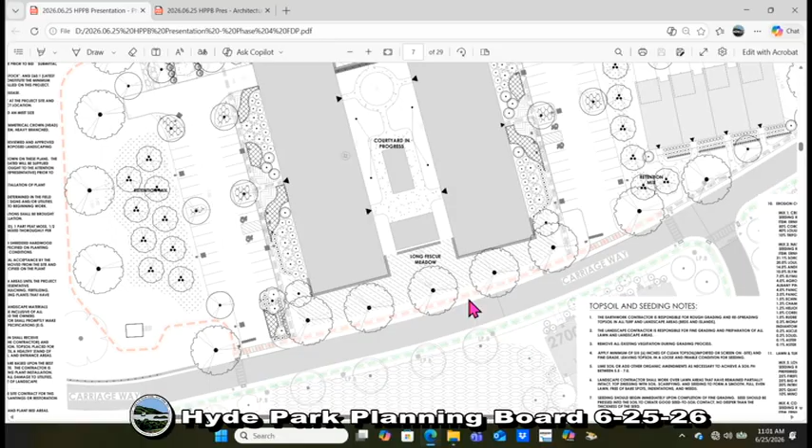Screening the pool, which is good. Even if we do the trees and stuff, if somebody wants to sneak in, he can. Sure, but this is going to have much more privacy. And then, since it's a pool, where is the fencing for the pool? Is it needed?

Somebody could walk off the street, go into the pool and drown, I mean, there's code for that. We'll show the pool fencing, it's required by code. We also owe you an elevation of that.

Hopefully that fencing will be a decorative fencing, maybe some kind of open lattice or something nice, not chain link. No, it won't be chain link. I'm just trying to get the picture in my head of what it is, since this is the first time I'm seeing the cabana type of feel. The other thing is, that cabana roof section, is it going to mirror what's happening up on the upper decks of the buildings, with cantilevers?

That was one option we discussed. Since it's in proximity to the condos, it'll have to kind of fit with the design. Yes, exactly, it doesn't need to look totally different. So you don't want a grass roof on it, or a tiki hut on there? No, I think the terraces on top is kind of what you're looking at.

I think when we get there, maybe a detail elevation in between with the surface material of what the back of that cabana is going to look like from the street would be very helpful, just to get an idea of what it looks like when someone's walking by the sidewalk. Yeah, we could add that to the street section. That would be great, just to give it a sense of the scale. I would love that, thank you very much, because you would ask for that anyway. Yeah, I like that. It comes to life for me. I'm starting to get a better feel for that area at this point anyway.

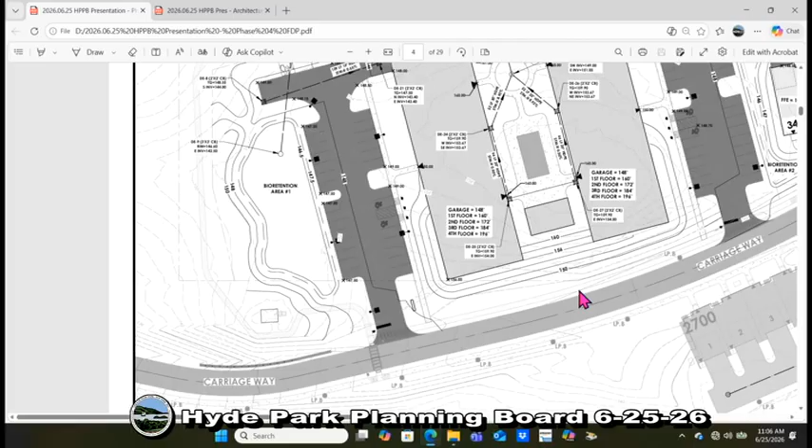Suggestion, before we go on to the grading plan, do we want to go over anything on the layout plan, or do it all at the end? It's up to you. If we have comments on the layout plan, maybe other board members do too, did you want to discuss those now? Hop right in whenever you like. It's because of the way we're seated here and how they're going through it. Please hop in before we move on if you have comments. Yes, but before those comments, I just want to get through the site plan first. Oh, all right, okay. Whatever works, and then he can have his comments on the site plan.

So 3,000, 3,100 is on the left side of the screen. That has the courtyard and the pool, and then the pool house cabana that we were talking about. As you go to the right side of the screen, you see the 8 townhouses there, and originally the driveways were in the front, they're flipped in the back. We re-engineered the grading and all the utilities, all now accommodating that switch, including the bio areas. So you'll see in the grading plan the different bio areas that had to be adjusted as a result of that move.

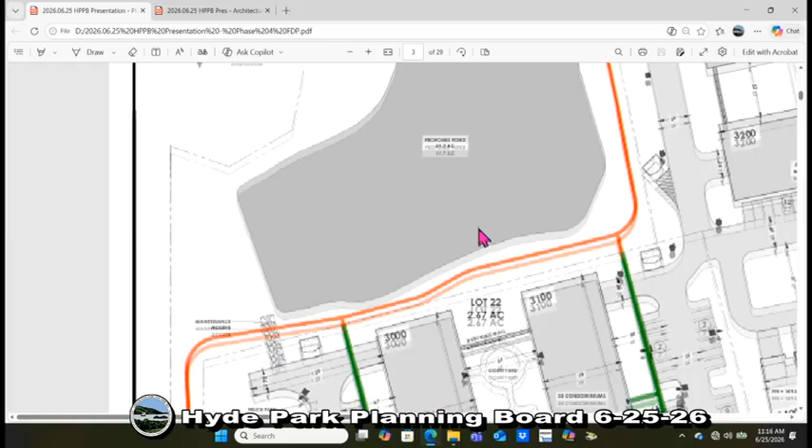We do show those. Are those the villas? Is there an elevation of the entry? The townhouses, I think he means. Yeah, those 8. So there's entrances on both sides. Do we know if they're dressed up or just plain? You'll see in the landscape plan, and in the elevation, the 2 access points. There's a landscaping plan that will be shown. It's mostly done, the courtyards have to be added.

I have a circulation question also, just for when it's snowing and somebody wants to get from one side to the other of this complex. I imagine the sidewalks will be shoveled, but the path will not be, correct? So people will go in the front, go around? That's correct. Okay, that's fair, just asking.

Our next comments are about the dumpster locations, which on the plan we reviewed looked like they were lining up with the driveways into the garages underneath. But I see on the plan here now they've been adjusted, it looks like for head-in garbage truck pickups. Are these going to be garbage trucks that come in head-on and lift over, or are they going to be side load? Mike is still working through it right now, they're head-on.

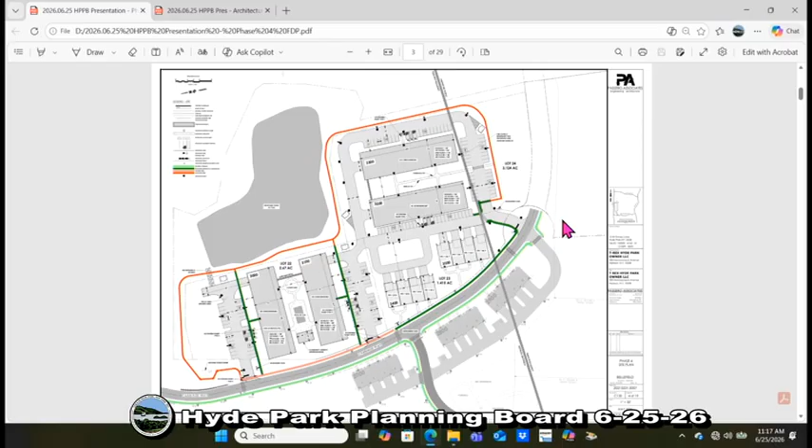Well, they don't work for head-on then, nobody could access them. The truck couldn't access them the way they're shown now. So you have to go look at it. What we could do is include it on our auto turn and make sure it works. But they can't, because the dumpsters are perpendicular to the roads. Well, they've got them different there, can you make that space larger for what they're talking about? Yeah, there was a change, we angled it.

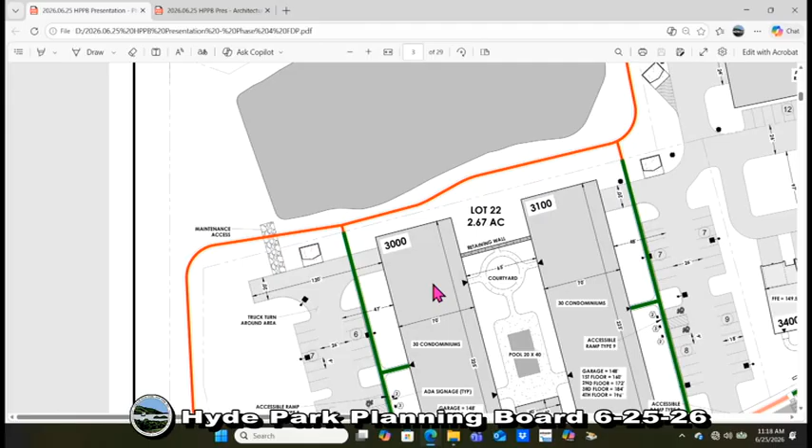Okay, thank you. So I guess we don't know, how is the garbage coming out of the buildings? Are individual people taking it to the dumpsters, or is it going to the basement and coming out? Is there a chute? There are garbage chutes in the building. It'll go down to a container inside, and then staff moves them out. Okay, so if you live there, you're not taking your garbage bag out. Right, so the distance to the dumpsters is really kind of irrelevant.

I guess the key thing is just that they can be accessible by the trucks. By turning it, we recognized that was a problem. Not only that, we wanted to pull it off of the walkway behind there, and you'll see in the landscape plan how we treated that too.

You just read my mind about the dumpster being right next to the trail. We dealt with it - it's a nature moment, we'll show you. We totally get it, wildlife. So we're not going to go through all our comments here.

But I do have a couple highlights. We talked a little bit about the surface treatment in the area between the two buildings, 3,300 and 3,200. It looks like you've already got a plan for a courtyard and some other improvements in there. Does that require any kind of fire access into that area?

We submitted this plan to Dan Nichols for his review. I asked him to call me, and that's where we're at. Generally we try to get 3 sides accessible on the building, so we're close. I'll get his comments and we'll go from there.

At the left end of those buildings is a retaining wall that looked like it was about 9 feet high on the grading plan we saw. That is correct. We're assuming there's going to be some kind of railing or protection at the top. That is correct. Chris, it's a site wall, so you've got to show it on your plans.

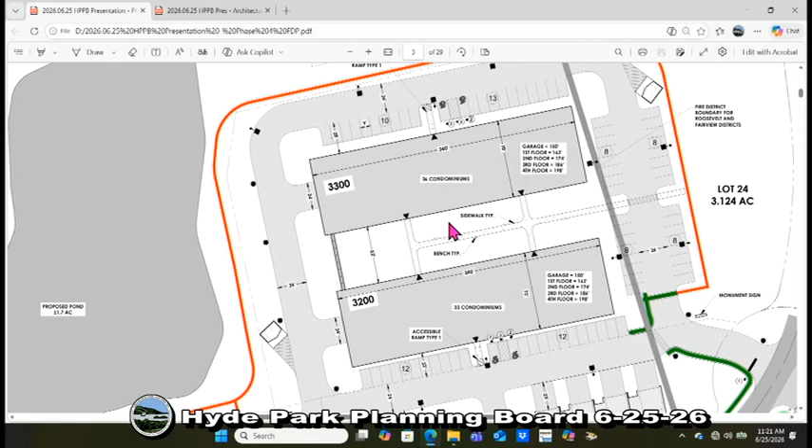And then with the grading, I think we talked a little bit about getting that clarified. I guess one of the things we were looking at - has there ever been any cut and fill calculations for this phase? We can provide it. Passero has an earthwork program, and once we're set, he'll run the counts on it.

I think again the planning board's already talked about understanding the elevations of the buildings and things like that a little better with the architecture.

Did you guys want to go through the grading and drainage before we make any comments? The next sheet here is the grading, we'll go through that. Big picture, any comments you have, let us know.

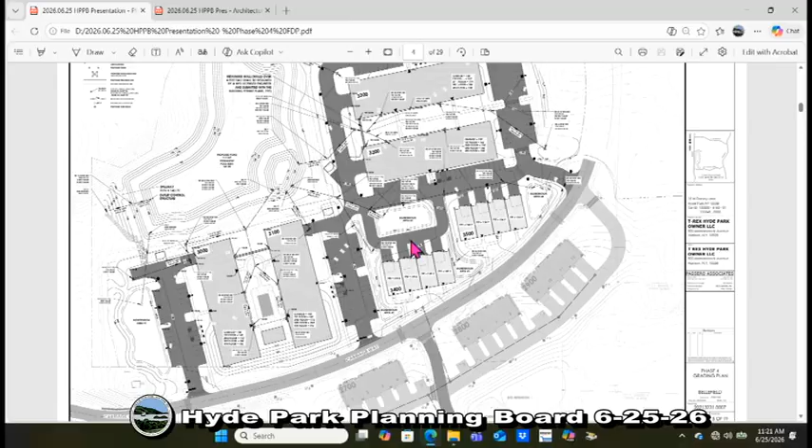By flipping the driveways, we had to reconfigure the storm water practices and the bio areas, so we had one larger area, a couple here, but now we have 1, 2, 3, 4, all graded in there. We show all the sidewalks with access to the front of the townhouses, and you'll see in the landscape plan how that was beefed up.

This is the same design, nothing has changed here. If you had any detailed questions, Chris is here and can answer that.

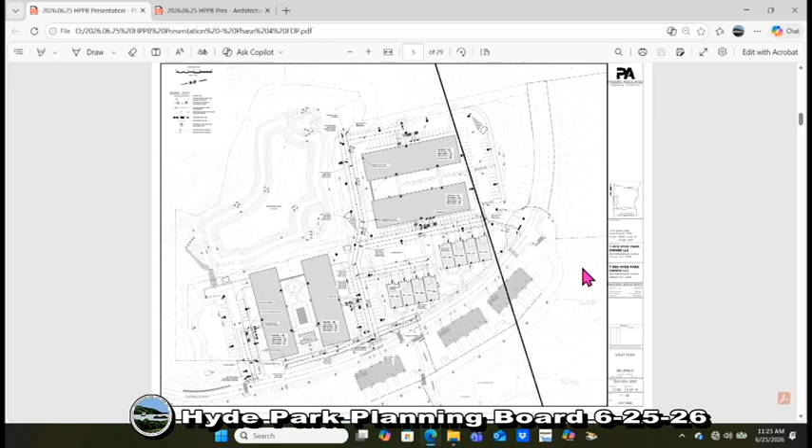Again, the grading plan is right here, if you wanted to come on down. One thing I didn't add to our letter, which is always a comment, is the material and stockpile storage area, staging area where a contractor's going to stage material, gonna be stored, stockpiled. I assume you're trucking the material to the area further north, right? Yes, you mean excess material? Yeah. Yes, that'll go to phase 2B.

I forgot to ask on the layout plan, which kind of corresponds with the grading plan, is like curbing. I didn't see a lot of double line curbing, and usually all of your sites are curbed, so I'm making an assumption it's still going to be that way for this. Well, in some cases where we're draining into a bio area, we just sheet flow right into it. Okay, so where there are curbs, it seemed like there was... I didn't see, and again, maybe... Generally they're going to be on the building side. Every parking area that's on the building side is curbed.

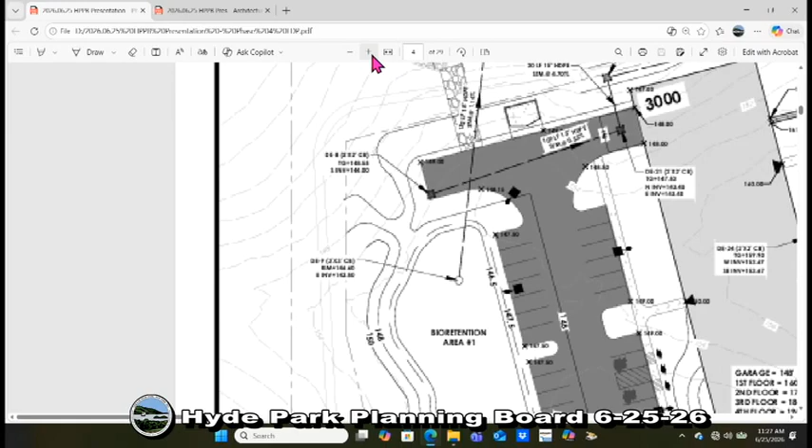On the outboard side of that, where there's a bio area, we can go into the grading plan, let me show you. Well, the grading plan didn't seem to have locations of catch basins in the parking lots where... Yeah, zoom in here, Sharon, zoom into that. So what's happening here is that there's a curb on this side, on the building side, no curb on this side. This just sheet flows right into this bio area, so there's no drainage here, just sheet flow, which is the preferred way to do it.

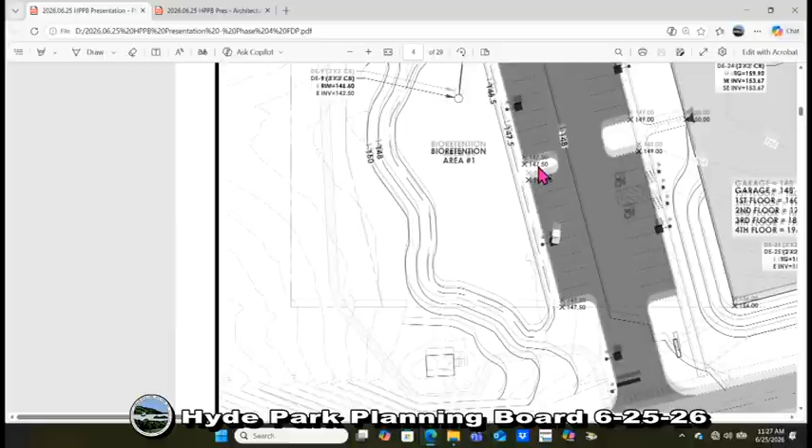Yeah, that's all right, we could start to annotate out some begin curb, end curb. Yeah, I think if you just detail the curb better so we can understand how it's draining and make sure you've got catch basins along the curb where you need them. And then those bioretention areas that have sheet flow into them are going to have some kind of pre-treatment? Those are some of the comments we put into our stormwater comments. Yes. And that pre-treatment helps give it a border or an edge to the parking lot. Yes, it does, it does.

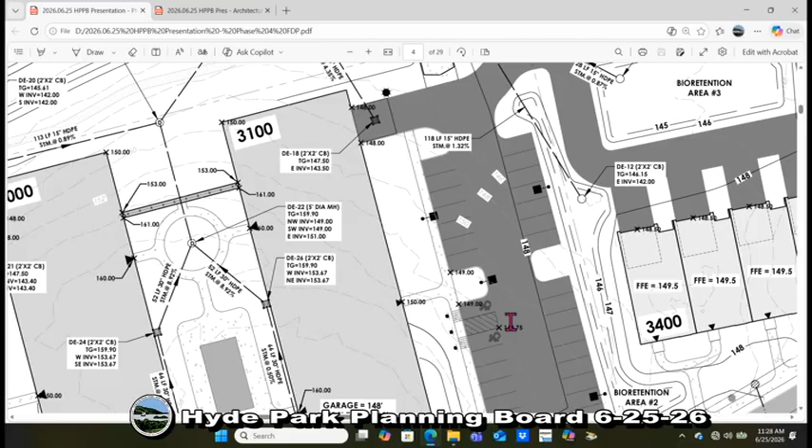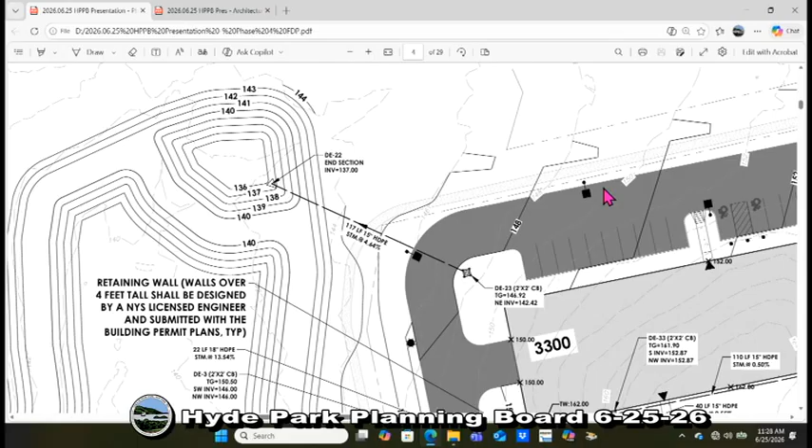And so here on this side, here too, curb on the building side, no curb on this side. You can see the contour sheet flowing right into it. Same thing here, there's no curb around here, this will sheet flow into it, and it's a gradual and relatively not so deep practice too. Yeah, this one here, Chris, we need to look at, it's showing that there's no curb here, the water would get into here, I think we've got to add a curb here and get it down.

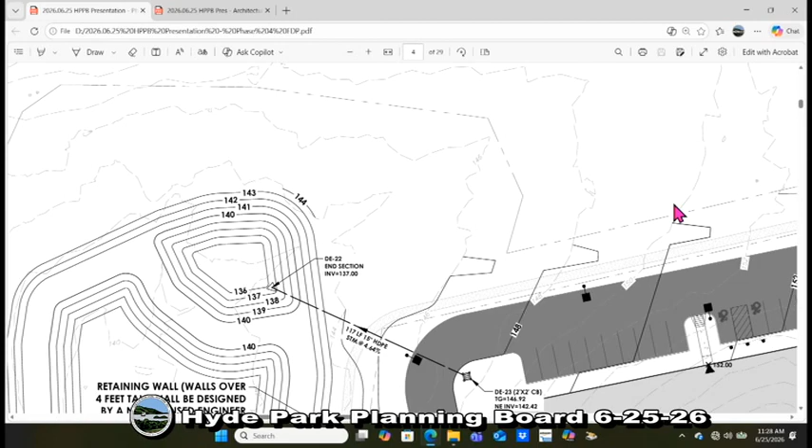Just remember, if we have heavy winters where we get a lot of snow - like this past winter - if you're counting on sheet flow getting off the parking lot into a swale, when there's snowbanks there, that's going to be blocked. That's really your issue more than our issue, but just think about it. There's a swale there, so I think we should probably look at piping it.

So I don't know if you wanted to talk about the pond and the stormwater design at all, or if you want us to just go ahead. We can talk about it, yeah. It's like the highlight of the whole project, right? The drainage - the elevations don't mean anything.

So before we get there, for topo and utilities, those are supposed to be shown on the preliminary subdivision plat. If that changes and it's going to go to an informational sheet, the planning board's going to have to acknowledge that when we're doing the subdivision. And if that happens, it probably makes sense to have those noted on the subdivision plans and referred to, so it links them.

Excellent, yep, so just go through that again for me. So for the subdivision plat, preliminary - it's required to have grading and 2-foot contour intervals and all the details for the utilities. I believe last time we did an informational sheet as a supplement. The planning board will have to acknowledge that in the resolution for the preliminary plat. And there's probably some other things that you'll want to either waive or reference as well. So that would be the way we'd want to go, otherwise it's just really a lot - it becomes complicated.

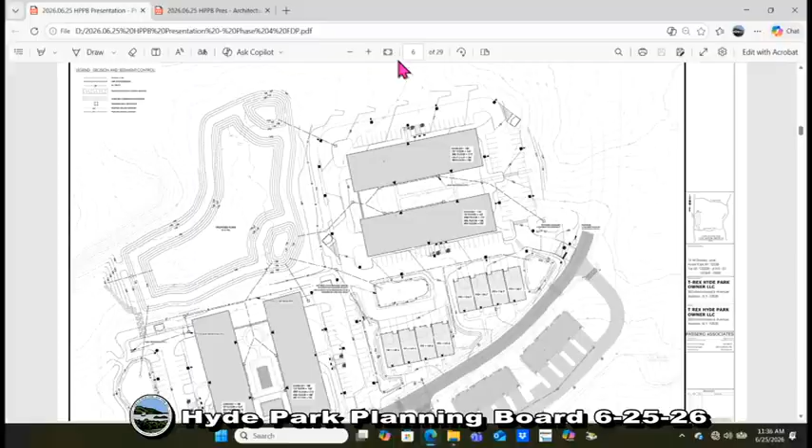All right, so the next sheet would be the landscape plan. Lighting, so landscape and lighting is done. What you'll see here in this middle sheet, you'll see all the landscaping for the courtyard.

In there, we are going to add the pollinator plantings on the trail. That'll be a good add. Go on down. Yeah, flip it here, anything you want? Okay, good.

You can see here there are plantings inside the bio areas, but we even have further detail on the bio areas in the coming sheets. The plant list, we made sure we didn't have any invasive species in there, and also we tied it to the Hart-Howerton design guideline plant list.

Anything pop out? There's sycamores on the road. Yes, well, what's neat about it is each one of those plants is a block, so when you add it, it automatically updates the plant list. Nice, so you're not counting every one, it's just whatever block the software uses. Yep, works for you, yep.

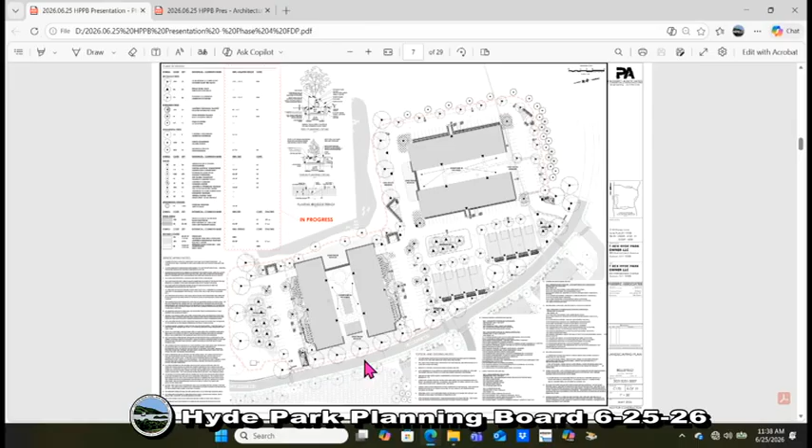Didn't we put notes on these saying something about substituting different plants? I think we did that for the NRI, and we did it with the Sterling also. There was a note on the Sterling part of it, and then NRI got it, and now this probably needs something like that.

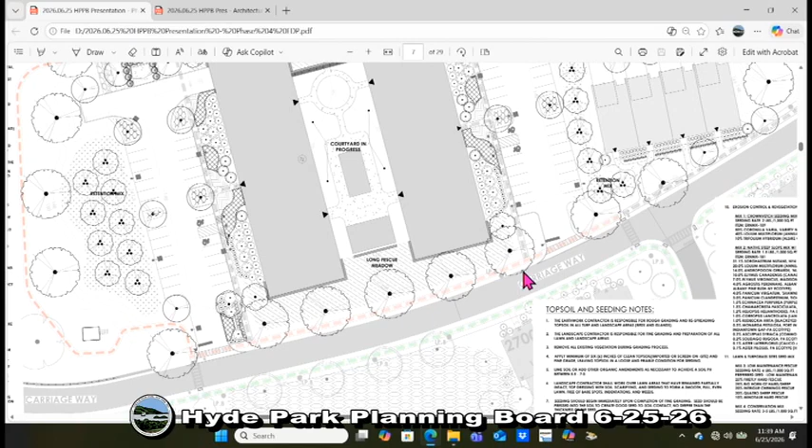And 2A is the villas, the townhouses? Yeah, for example, the Phase 2 townhouses that are under construction. Carriage Way was designed with plantings on both sides of the road. We're now showing sycamores here that were not on the prior plans, it's a change in species type. Obviously the designs on the other side of the street are right, but we may be changing.

So I just want to make sure we get whatever we need. We need to go back and talk to Tad about that, because 2A is a separate site plan, and it's the first one.

And the landscaping needs to be in when those are complete, which I think will be before this phase goes in. Well, we need to discuss that because there's construction. If it's gonna create a problem, we'll just match whatever's approved. Let them have the discussion to figure it out, but I think moving forward we should build into our language about substitutions and make sure that's a standard part of the final development plan.

Well, I think what we'll do is add the note, but we should show what was approved on 2A. And if we have the note on there that we want to substitute, then we'll do it. But the note has to be on 2A, not here. A note here is not going to impact 2A.

So we're just gonna show 2A as approved and let Tad go back and think about it, because if this makes more sense design-wise, maybe you can apply for an easy site plan modification for 2A for the landscaping, so that can continue on its own path and not get caught up in this. And when they do that, we can add language that allows substitutions in the future, with some reasonable language.

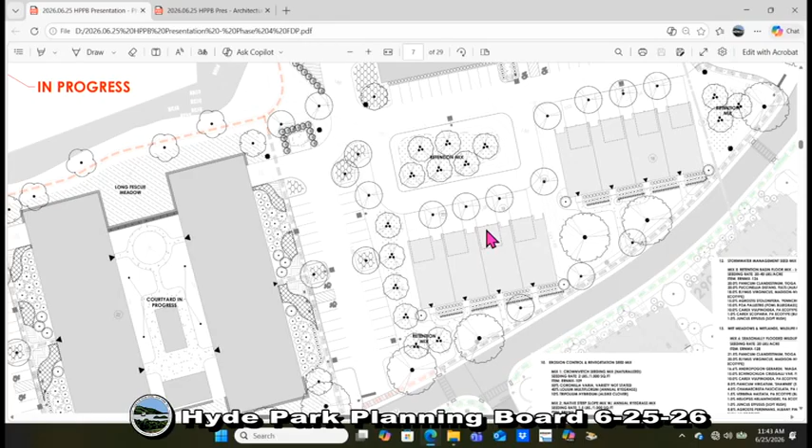Buildings. Condos, no, we want to do per building. You start like 3,000 per building, or do you want to do sets of buildings? I mean, why wouldn't you do the 2 buildings that have the parking lot in between them and get that all finished up and nice, then move on? I don't know, it's up to you. We'll have to figure out if you want to break them up. We will add a phasing plan.

So we'll have to figure out, similar to what we did for the One and Only project, here's what you need to have in for a CO for building number 1 or building number 2, whatever. So we'll figure that out, that's fine.

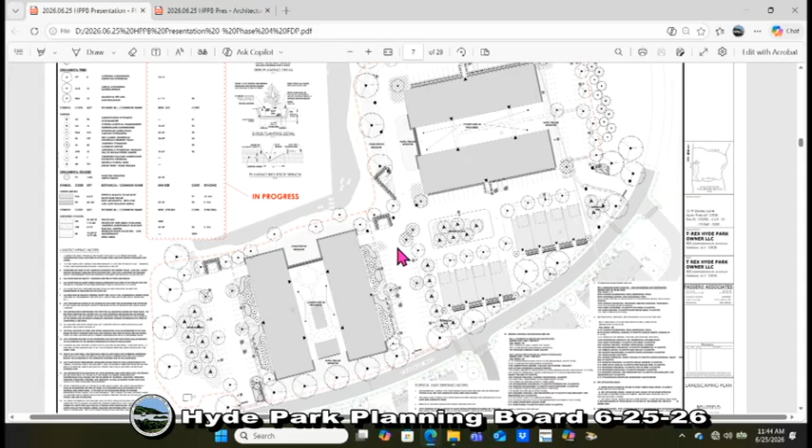But if you're going to want COs in, no wait, we're going to build this at the same time, there's 2 buildings, but we might be completing the first building sooner than if I have like 30 buyers there. Sure, I want to understand that. CO done, but I'm still might be working on finishing up some. We can have a separate discussion on that once you guys get a little bit more clarity on what you're going to want, and then we'll make it work.

Do we need to show a phasing plan on this for the site plan? Yes. I didn't look at the erosion control plans, but maybe there doesn't need to be. Well, it seems like 2 different things, the erosion control plan construction phasing versus building CO phasing. So I think the building CO phasing might make more sense in the site plans because it's not connected to the erosion controls.

Like what they did, Larry, on the One and Only project - it was much more involved than this, but it's something that you're probably going to be looking for as you develop other phases. They had included a separate phasing plan that was just for more or less the COs. So when the building permit application comes in, there's a box around each building that says this is the landscaping shown on the landscaping plan for this building, and this needs to be in this area before CO.

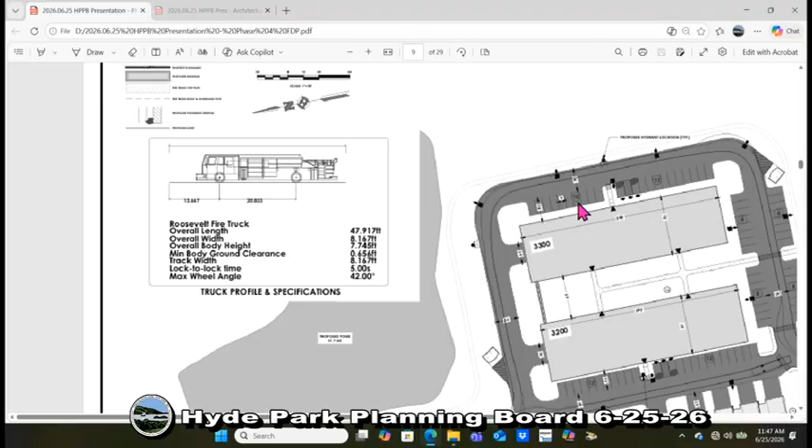Sorry, Larry, I don't mean to interrupt, but is there no lighting on the path around the pond? No. There's spillover light, I see that, but I mean on the actual path. I don't see anything. It's a natural kind of crushed stone path. Okay, so make sure that's light colored, right?

There's only one pool between all the buildings, right? We have miles of this stuff all through Belfield. And it's better for animals to not have the light. It's better for the animals to not have the light. Oh, no, I understood that, yes.

But walking though, what do you use? A flashlight? What about bollards? If you're hardcore, you have your headlamps. This is how people are getting to and from the amenities. From a safety perspective, as a woman, I would not walk that at night. Agreed.

I mean, we lit this thing up, I guess there's a 1 foot candle minimum, 5 max, so we gotta check that. Chris, make sure you got that, yeah, it's right here.

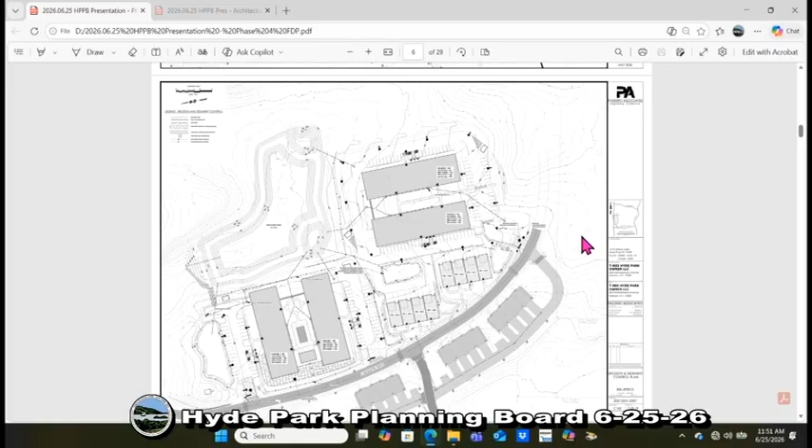Except maybe for the pool, right? Well, I thought I heard you say those two buildings are also going to have a pool. Oh, it has its own pool? I'm sorry, I didn't know that, so that changes things a little bit. I didn't want to call you out on that, but I did hear you say that to Larry. Yeah, that's new, okay.

So they're each very contained as far as not having to share amenities. In my experience, people don't really want to anyway, they don't go over to the other side unless they're visiting a friend. All right, good. Is there any need to go from there to there? Is it indoor or outdoor? The pool? Outdoor.

All right, so any more questions on the lighting? Can you zoom in on that? I want to see the average foot candles. Zoom into the chart, see if you have it in there. Yeah, zoom in more.

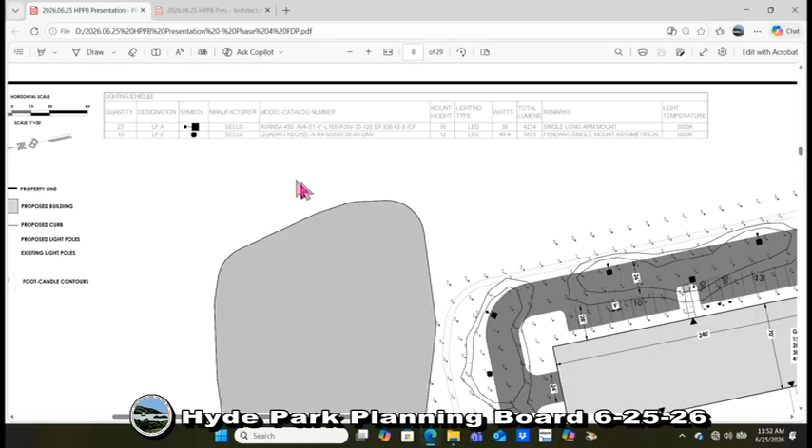So Chris, give the average foot candles on this chart. There should be a separate table for that - if it's not on there, we'll pop it up, with the lighting zones. All right, so we'll go with that.

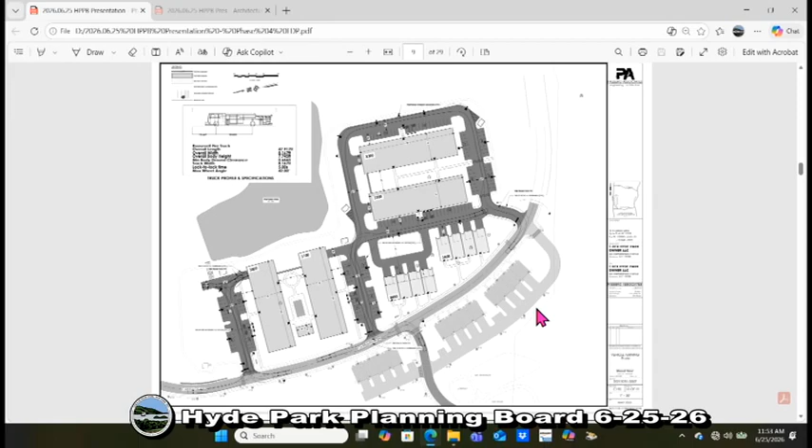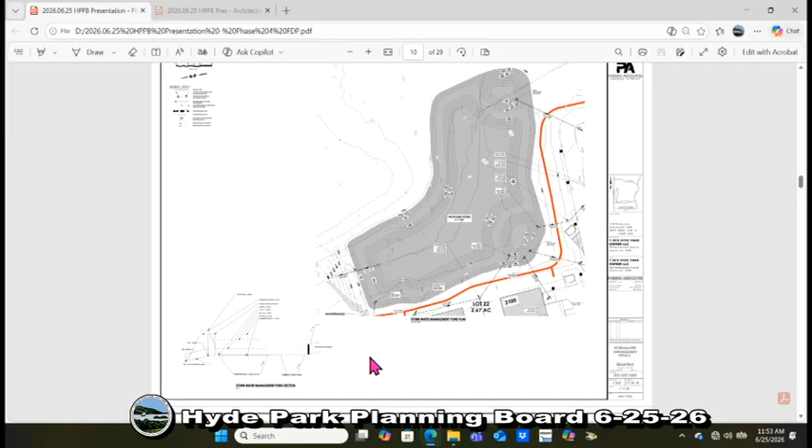Next sheet - the fire trucks, we talked about that. Next sheet, we're getting into the pond details, but we talked about the pond. We do owe you another cross-section, and of course the planting of the aquatic bench.

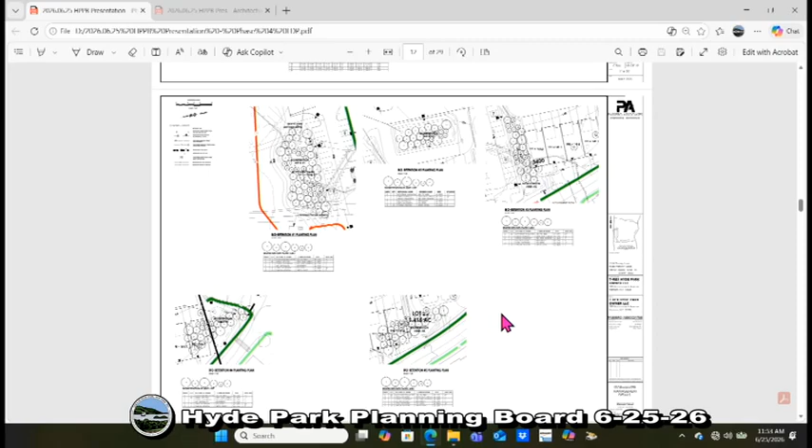Next one, this gets into the bio areas, defining them, showing the grading of them. And this shows the planting of the bio areas, so we'll finish this up for Tuesday's submission. Do those details show your pretreatment too, for the stormwater? Yeah, they're gonna have to, so we'll have to do that. We'll put the diaphragms on there.

And one other thing I put in my letter that I probably should have asked you before - on the Phase 2A townhomes, there were generators for those units. Are there going to be generators for these townhomes or the condos?

We could show the pad, Mike, for the generator, whether you use it or not. Well, if they're gonna be there, they have to be on the site plan. If you're gonna propose them, they need to be on the site plan. No, I know, that's what we could show on the site plan, and if he chooses not to do them, then they come off. Yeah, that's fine.

I think so too - it's harder to add them later, it's easier to show them where they would go. Are you gonna have all the notes from Phase 2A, like exercising at a certain time and so on? Landscaping around them too if you're gonna put them in.

On the site plan, we show 3 monument signs for each parcel - 22, 23, 24. We will have to update the sign manual, so we're working on that. Emergency use only.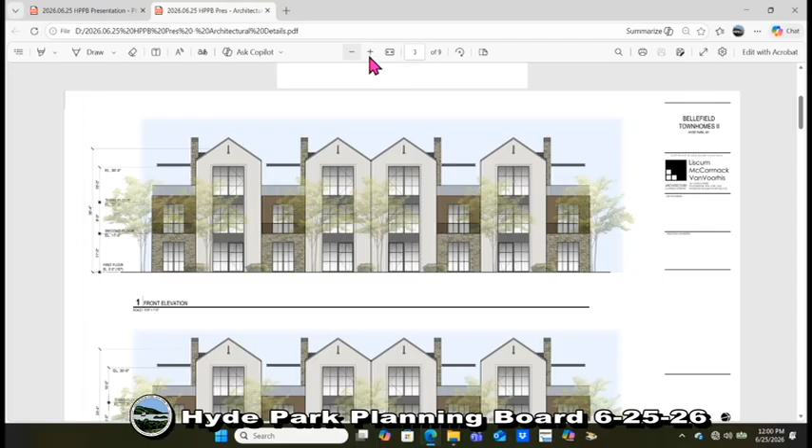At the top? Yep, it's at the top. So kind of at the main gable, the three-story structure - that would be the main entry point into the residence. Okay, that's the front - the gable one is the entry. Yep, so there's four units kind of mirrored in the middle, very similar to the townhouses across the street, and the gable represents the main entry point to each residence.

And what kind of door is it - is it a swing door, or is it sliding, or a pivot door? Yeah, pivot door, you can kind of see the pin. Okay, good, I like that - we can keep the proportions that way while it's a pretty elegant way of entering as well.

What's a pivot door? And what's it called? Instead of hinges, pivots - it essentially has 2 points at the top and the bottom. It's a dowel system instead of a hinge, so it spins.

It's kind of like a revolving door in a building, but it's only one door at this point - it's almost like it's on the side, in the middle, but it pivots. With the glass, you can structure it in a way where you can kind of maintain it so you can push it with a finger.

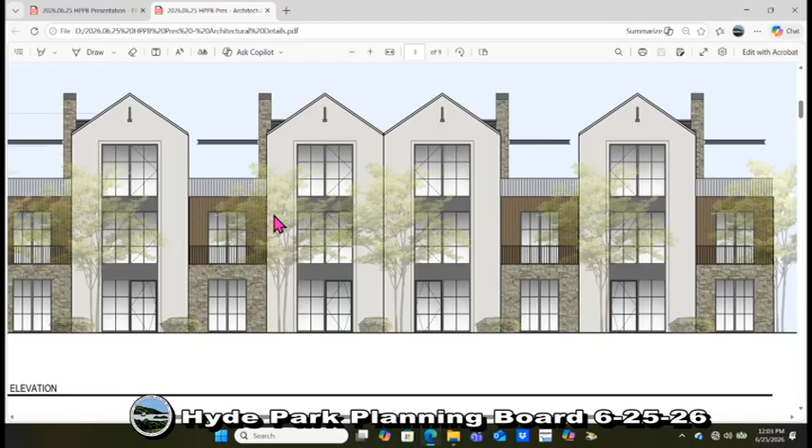This is the most recent, we just moved the garages back. So these still have the garages up front, which you can kind of see. There is some indentation.

People are gonna want an overhang, so it's set back, right? In other words, the foundation or the footprint is set back, to protect the door itself. That's what I was thinking.

Yeah, when you come in from the rain or whatever, everybody's gonna want that. They'll do that. That's exactly it, balconies in the front. This one's gonna have like the big overhang, and the doors will be slightly in.

Okay, and on these also we'll play with the shading, because we do need to provide elevation still, help make those pop a little bit. I think those rendered, or Axon views, would help.

I want to do the similar to what we're gonna have at the original townhomes. Okay, yeah. And where is that, is that off of those entries?

I mean, do you think you'll put it near the entry so you can go up? I don't know the floor plan, I don't need to get into the floor plan really, but it's just nice to know where that is located.

We have a concept on the floor plan, we haven't finalized everything yet, so, because Tom and I are gonna work on that.

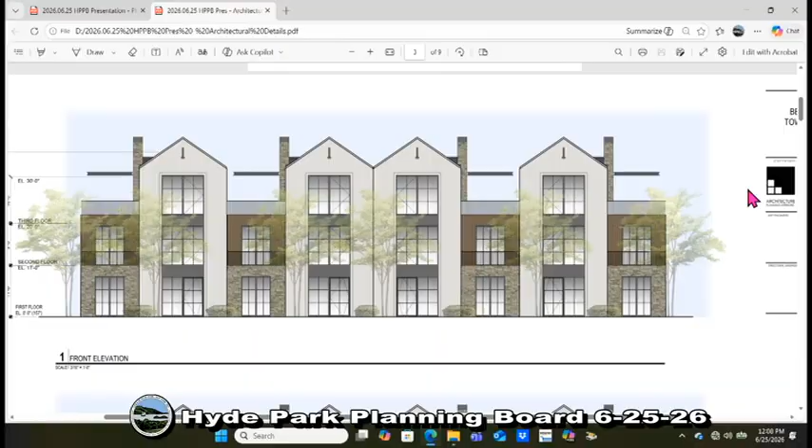I do think that bird's eye view with the front yard will help with the entry and understanding all of that. Yeah, there you go, you got the bird's eye, everybody loves the bird's eye. But I like the fact that you have the front and rear entrances.

That makes them really accessible. I think this overall shift has helped a lot - you come home, you come in the back entrance, you want to go down to the Village Green, you go out the front entrance. I think in a place like this you want to have your own entry, not come in just through a garage. Especially with this product, so it elevates it, I think. Flipping them around like that was a good idea - we scrambled and made that work.

All right, so we'll move over to the plat. Do we have any questions from the consultants or Tad on the architecture? Okay.

We'll share - I'll take it. Can I take it? Perfect, give it to Jerry. Got one more? And no changes to architecture for the big buildings?

Well, there will be some change to 3200 and 3300 with the modifications to the drive island. It'll be much simpler now, very similar to 3000. The length is the main change.

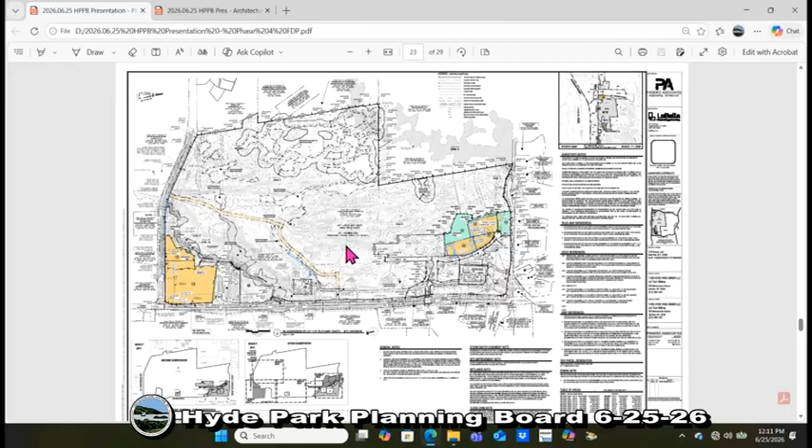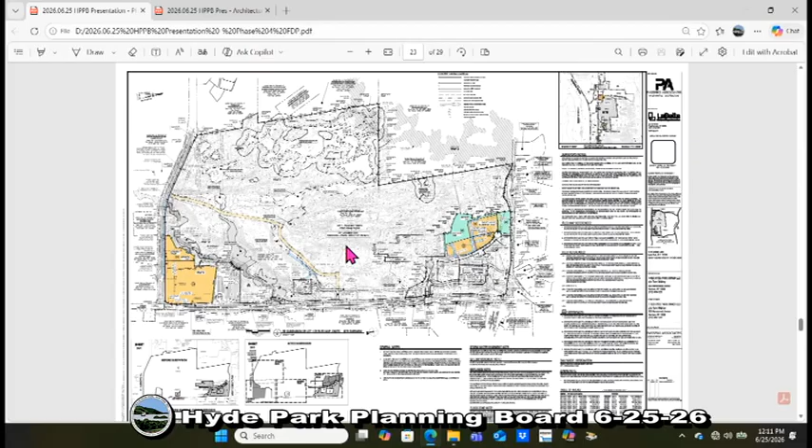So on here, we made adjustments to lots 23 and 24, those have been updated with easements, and there's a few more easements we'll need to get on there. 117 and 118 have not changed, but you can see all the easements, sewer, general purpose easements, going through there. We want to get this preliminary plat approved and get to final ASAP so we can start writing all the easements. So again, thank you Tad for getting this to us, we'll get this updated in our submittal for Tuesday.

Any questions on that, on the plat? I've got more written down, but Pete, did you guys do anything for the subdivision? We started a review of the subdivision. It was basic comments on what we reviewed - had a lot of text conflicts and some blanks as far as deed references and things like that. I think the color coding is probably helpful, but without a key or legend that goes with that.

We're going to add it. And the other thing that goes with that is if that's trying to be put on a filed map, the color's not going to translate. Understood, this is just for us. Yep, it's just for us.

So that was about as far as I got into the review, honestly. There hasn't been much over the years that, from an engineering standpoint, we would typically look at. It's mostly just looking at the easements, are they conveying flow from one phase to the next? You may want to get with the fire department on access, but they should also take a look at the hydrants, where you're going to have hydrants, because perhaps some of these water mains have to be extended.

And actually, you're not going to go finalize these until you get further along with the health department, right? Well, from a plat standpoint, I think we're moving along pretty quickly. The health department, we expect to get 2B approved, very close to getting that approved with the DOH. We got their final comment. Right, and I'm talking about for this one. Yeah, for this one.

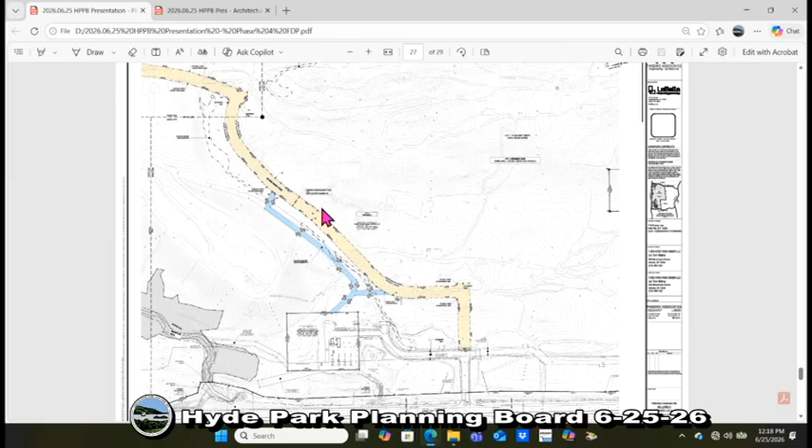I strongly suggest - no, we didn't do that pipe. It exists. If you want to walk it, it is there - there's a pipe, a culvert pipe. So you put the whole thing, the pipe and culvert in? Jesuits, I believe. Everybody blames the church. Yeah, this water course goes here, and it disappears.

And it pops out here and comes on down. The Corps walked it, and they determined that this is what they wanted to take up to here, and then pick it back up to here. And that's the water course that comes out behind, or by where the sewage plant is, right? Yes. And what about there - was a pipe there?

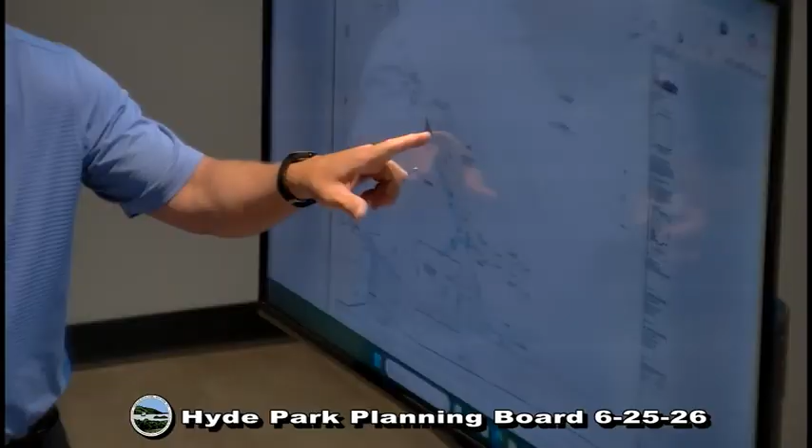Well, that wasn't an actual pipe. What they would do is build stone boxes, and the water would flow through as a line ditch. Oh, okay, all right - like a culvert. And that's what's there now?

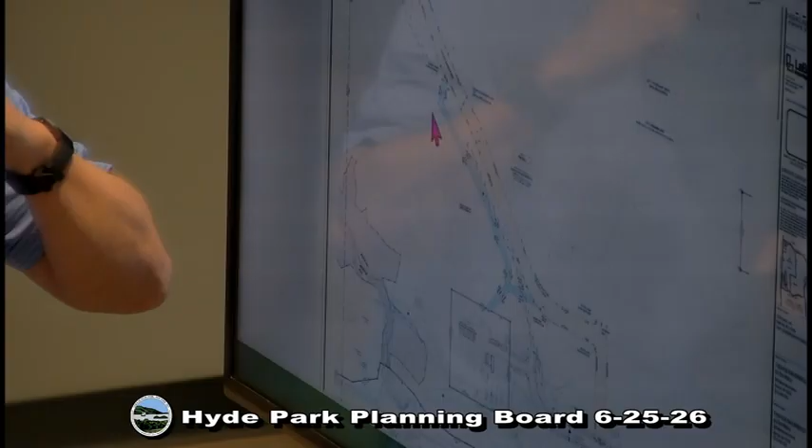Yes. And along that multipurpose easement, there seem to be a couple of other crossings that would require a culvert or some kind of drainage accommodation under that. Those accommodations are supposed to be shown in detail on the preliminary plat, so somehow we're going to have to figure out how to address that.

Okay, I'm going to have to come over there. Now you're in trouble, Tad. Yeah, of course, always. Just make sure you both use your microphones - we need a cameraman on wheels.

So I believe there's some sort of a crossing near St. Andrews, and it looks like there's one kind of halfway, and then there's another one that might be in this area. And then I'm not sure about this, what happens down in here - it's kind of difficult to see. Yeah, it stays on this side, on the east, the north side. And then this is going under that waterway - the idea here is we would directionally bore under, we don't want to deal with it.

Okay, directionally bore there. This right here, I think is almost a high point. I'm not sure that's close. There is - so there might be a culvert there already? Yeah. So I think those are supposed to be shown somewhere. Okay, we can show it, but the actual design...